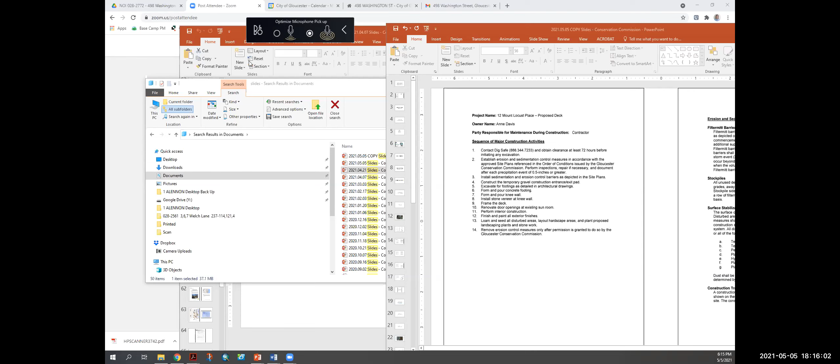So I noticed on Hart Street last year, a new house was built right on top of the wetlands that are at the end of the street, closer to Bass Ave. And I heard there's another plot right next to it that's also available for building. I don't understand it, it's right on the wetlands. It has the little waterway going right by the house. What is the ordinance regarding this? I thought our wetlands were protected way back.

Well, Kathy, if I may speak, the project came before us. It doesn't necessarily mean because it's in green on the website. All that means is it's in the buffer to the resource, and therefore they have to come before this commission, which that house did. It's a very unique situation, basically in the marsh, but it did get reviewed by this commission.

We have no control over what may or may not be another buildable lot, but we did review that one. They are protected when it comes to buffer zones. Everybody's allowed to come before the commission and propose a project. We did our job back then. Unless there's another project, we're not here to discuss things that don't exist yet.

I just wanted to know what the facts were, because a lot of times you see something being built before you even know about it. Everything's public, and if people don't choose to go look on the city's website or conservation page, they're all posted publicly 48 hours in advance, and all abutters get direct notifications. So it's kind of a cold argument to say nobody knows. It's that nobody's looking, unfortunately.

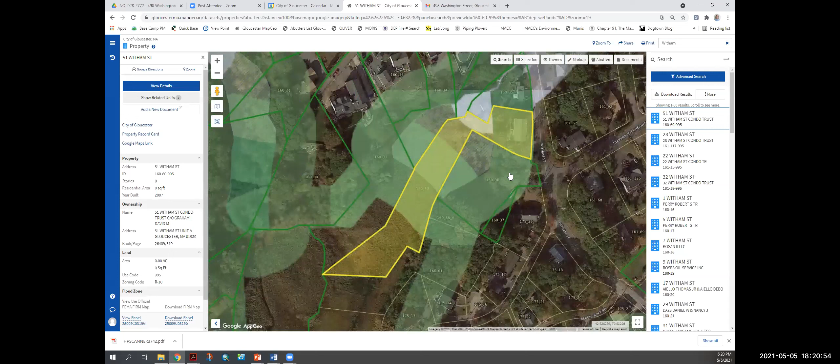Well, in this case, the abutters were not notified. They got a letter from the owner of the land the day before the trees were to be cut down. So that was not done in accordance with what was supposed to be done in the correct way. Well, a mistake could have been made. It's rare, but notification's required. They can't go forward without it.

So I don't know where your information came from. It wasn't done that way. My mother lives there, she got a letter, I saw it, and I talked with all the neighbors on Ledgemont Ave. They got the letter a day before. They were not notified ahead of time, and big oak trees that were 200 years old were cut down.

That person could have made a right of way on Mount Vernon Street. I don't know why a whole neighborhood had to be ruined and possibly a throughway road going through there. Unfortunately, we don't deal with that, we just deal with wetlands. Well, there was a pond there that was filled in, so there's wetlands there for sure. There's a map of it.

So who's the tree warden now? Is it the DPW director? I have no idea, I would assume it's not us. So there's no separate tree warden like there used to be back in the day? Not that I know of. There should be, that's something to consider again.

If I were in control of it, we'd have one, but I don't have that power. I heard it was the DPW director who was the tree warden, but to me that's a conflict of interest.

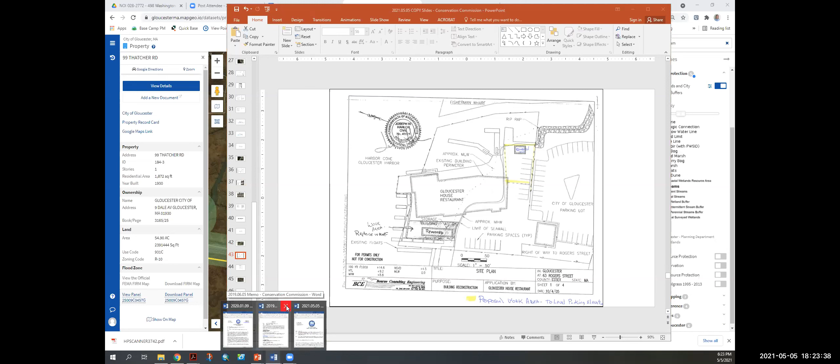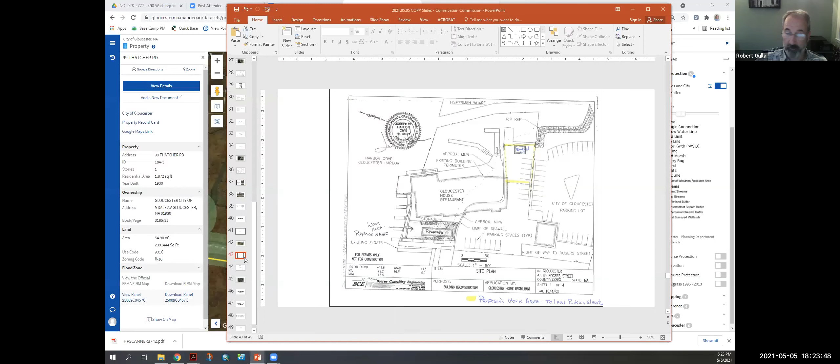Keep pushing on what's going on there. I mean, what do I do, call the mayor? Whatever you feel you have to do, but I'd really like to get back to this meeting so we can clean up some of the things we do have control over. Okay, well, go right ahead. Thank you very much, you have a good night. Yeah, you too.

Is there anyone else in the public like to speak? Shut me off, I'm still here. There's not. I'm here. Okay, next up, with seeing none, we'll close the public comment period.

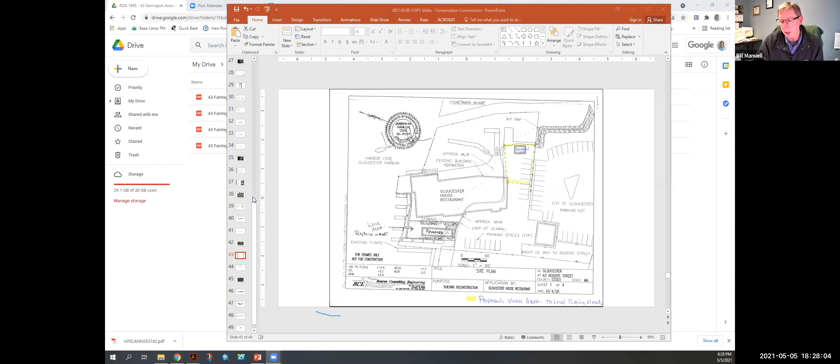The plan shows some very subtle swales along the left and right sides of the house—hopefully we'll get the plan up there, but I'll keep talking. Those were there because in the original hearing, the neighbors were concerned about runoff from this site going onto their property. There's a detail on the plan just to the left, and you can see it's a very subtle swale, about 6 inches deep.

I did have a conversation with the attorney for the abutter, and his concern was that there's a lot of vegetation on the property line, and they were worried the excavation work might impact those plants. I reemphasize, this is only a 6 inch deep swale—I don't think there's any root growth within 6 inches of the surface. If it happens to extend over the property line, I'm sure it does.

I told Attorney Nestor I would look into that, and I've been considering it. I asked the design engineer if that swale could even be removed, and he thought it was necessary to prevent any runoff from the site going onto the abutting land, which is a very important concern of the drainage permit. So I think that work can be accomplished by shovel work, or perhaps by running a rototiller set to 6 inches deep down that side of the property to loosen the soil, which can then be shaped with shovel and rake. The swale is comprised of filter fabric and crushed stone, so it's not a deep excavated feature. I think in some creative way along those lines we can accomplish that grading without any impact to the abutter's vegetation.

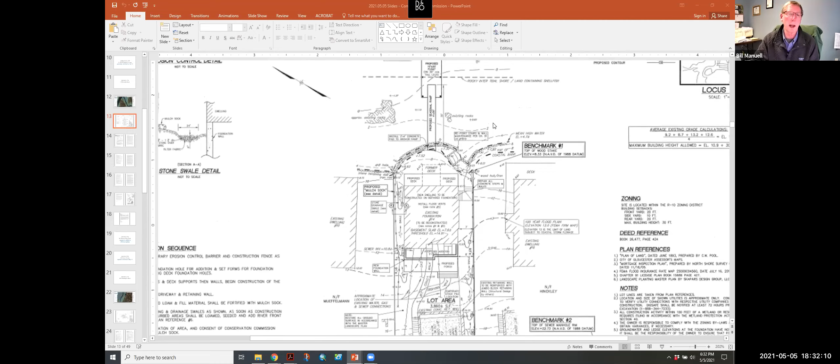It is a 30-foot ramp and a 10 by 20 float. It is not going to rest on the bottom at low tide, and it will have wood standoff legs so that it does not rest on the tide flats. The Division of Marine Fisheries commented that this was designed in accordance with the DEP guide for small docks and piers, and that they didn't have any other issues with it.

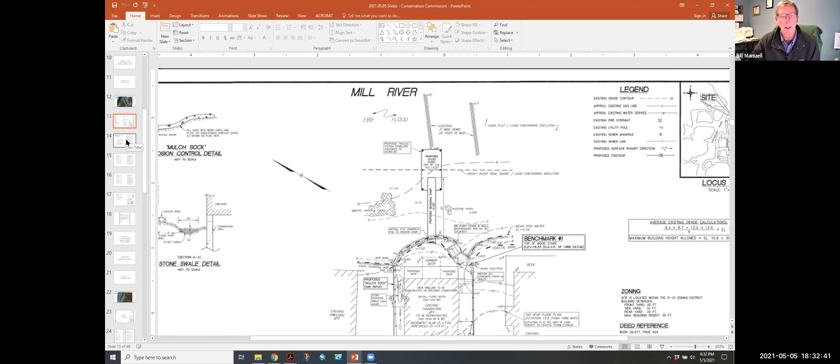We also included in the submittal an extensive landscape plan. So that is also included in the filing, and it covers roughly - the lot itself is only about 3,800 square feet, but there is about 1,500 square feet of landscaping proposed for the property, so that essentially it becomes a low maintenance or no maintenance type of landscape.

So we've got all the comments and file number and everything that we need. We've got the indication that we're going to get the drainage permit. We've got comments from DMF. We've got an updated site plan. So we feel that we're in a good position here to close the hearing tonight and get approval.

You are, I'm sure, going to hear from abutters' counsel. There are zoning issues, we're well aware of that. There were zoning issues when this was approved back in 2007. The owner went to the Zoning Board of Appeals and got all the necessary approvals from the Zoning Board of Appeals. Unfortunately, due to health reasons, he couldn't enact the permits and relief at that time, so they have expired. We intend on going back and obtaining all the necessary relief from zoning.

One last thing I forgot is the seawall. The usual, every time we come to the Conservation Commission, when there is a seawall, it is a masonry seawall, and we would like to repoint that wall and repair it. It's in relatively good shape, it just needs the usual remortaring and repointing. We can put tarps down - obviously the work gets done at low tide. The usual practice is we put tarps down so that anything that's chipped out of the wall can be recovered and then removed out of the intertidal zone.

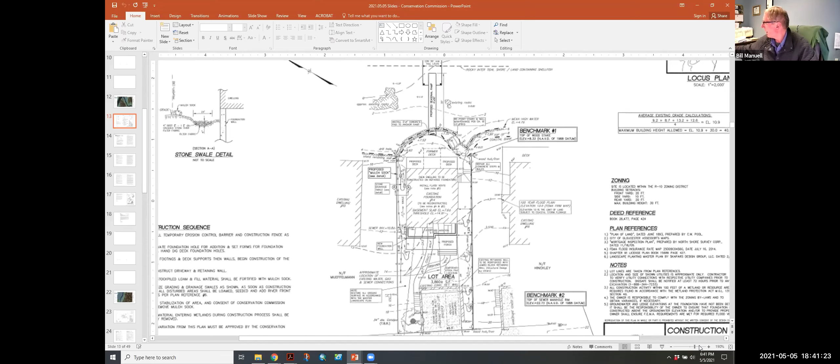I thought I had put on the plan to install an orange high-vis plastic fencing around the water edge, and I just checked and I don't see it, but that could be a condition you add - to install a plastic high-vis fence along the water line, and that way it'll catch any blowing debris. We can certainly double up the mulch sock. I suggested a 12-inch diameter mulch sock, which is fairly beefy - you can either do an 18-inch diameter, or do two 12-inch ones, one on top of the other.

Once you get down onto the grade of where the house is, the land is fairly flat. And as I said, the excavation work for the expanded footing and foundation is on the opposite side of the home, so I'm really not concerned that we're going to have a sedimentation problem.

With respect to the neighbors, you don't have to go there. We're not here to deal with neighbors. That's fine, I just want to point out it's a back and forth, and I did speak with the owners, and they're equally concerned with preserving the vegetation over there. So somehow we'll work out a solution that alleviates everyone's concern.

Thank you. Okay, with that, I don't know if you want to do roll call comments one more time. We want to move this, whatever the commission wants, it's up to you guys. Why don't we do roll call comments one more time now that they've had a chance to absorb it?

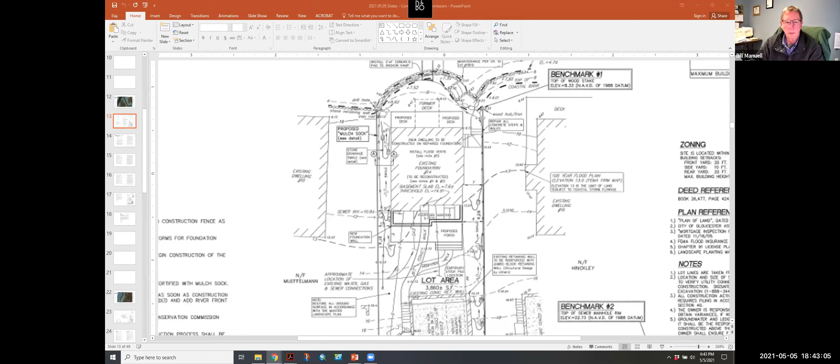Follow-up comments. Commissioner Charpentier, no comments. Commissioner Cook, no comments. Commissioner Gradwell, no comment. Commissioner Sargent, no additional comment. Co-chair Gullo, no more comments.

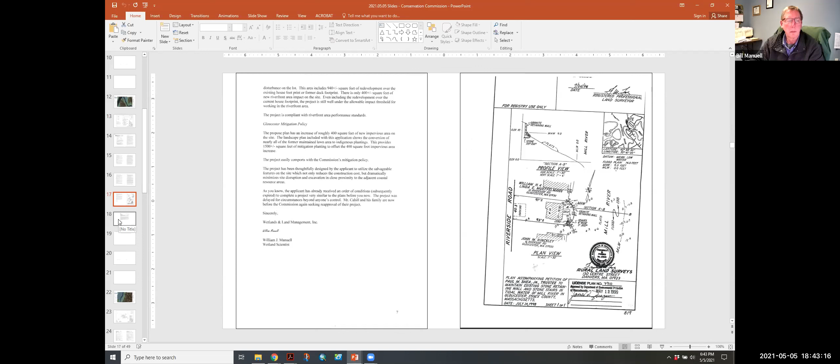And Co-chairwoman Jackson, no comment. Okay, so with that, why don't we get a motion to close the hearing? Commissioner Jackson moves to close the public hearing for NOI 0282779, 14 Riverside Road. Charpentier seconds.

Roll call vote: Commissioner Charpentier, yes. Commissioner Cook, yes. Commissioner Gradwell, yes. Commissioner Sargent, yes. Co-chair Gullo, yes. And Co-chairwoman Jackson, yes. Thank you.

Commissioner Jackson moves to approve the project for NOI 0282779 at 14 Riverside Road. Charpentier seconds. Roll call vote: Commissioner Charpentier, yes.

Commissioner Cook, yes. Commissioner Gradwell, yes. Commissioner Sargent, yes. Co-Chairman Gullo, yes. And Co-Chairwoman Jackson, yes. Thank you, thank you commission members.

Thank you. Before you move forward, Chairman Gullo, if I'm showing the wrong screen you have to let me know. Oh, I'm sorry, oops. I have 3 screens going. This is the right screen though. Now you can all see it, right? Yes, yes. Okay, thank you.

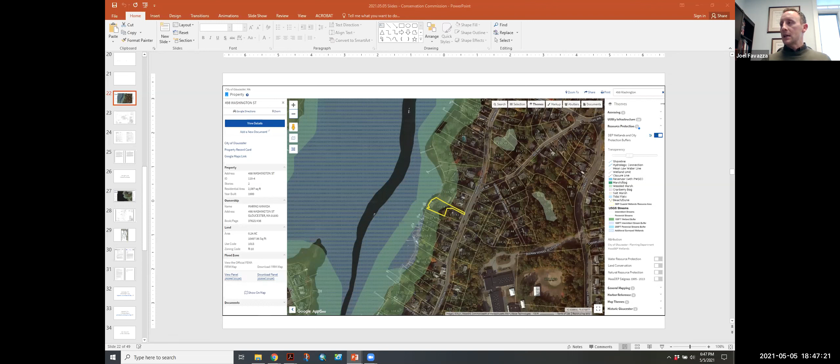We received some comment from the Division of Marine Fisheries regarding the deck that had been proposed. So we sent a retooled version of the plan that addressed both those comments and a few of the comments made by some of the commissioners at our last meeting. To go through those in no particular order...

The deck itself was originally 15 feet off the face of the proposed structure, which again is a rebuild. At our last meeting we talked about pulling it back another 3 feet and eliminating the piles to address some of the comments we'd received. Then based on additional comments, I believe from Mr. Sargent, we've tucked the deck in another 2 feet. So this deck is now 10 feet off the face of the new building.

There are no piles. Another comment that was brought up was the concrete retaining wall at the lower end of the driveway. That has been changed to a stone retaining wall to make sure that runoff is able to infiltrate into the dense mitigation plantings on its way down the driveway.

Now, we had stopped last time discussing the alternatives analysis, and we'll touch on that briefly.

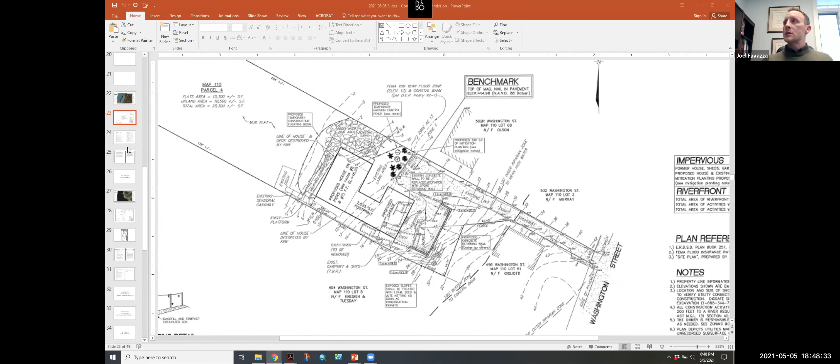Adrian, would it be okay if I shared the screen? I could do that for you, Joe, we'll have to step through. I will have to promote you to co-host, and then you can take over the share screen. Okay, thank you.

Thank you. One moment, I'll be right there.

Okay, so in thinking about how to discuss this tonight, make sure that we all understand these plans to get all the information that you need, sometimes have a lot of lines on them. So I try to color code this as best as possible so we can talk about what is going on in the Rocky Intertidal Shore area.

As you know, we're in the riverfront, so we have an alternatives analysis, and the standard we have to go by is whether the expansion of the existing structures improves existing conditions, and also whether the overall result enhances the capacity of the riverfront area to protect the interests identified in the Wetlands Protection Act.

One of the things that the Division of Marine Fisheries pointed out was that it's important to allow sunlight to hit the Rocky Intertidal Shore because that allows plant and animal life to receive the benefits of direct sunlight. So if you look at the plan I have up, I've tried to color code it. Me trying to make it simple means there's 5 different colors, so take it or leave it. I'm trying my best here.

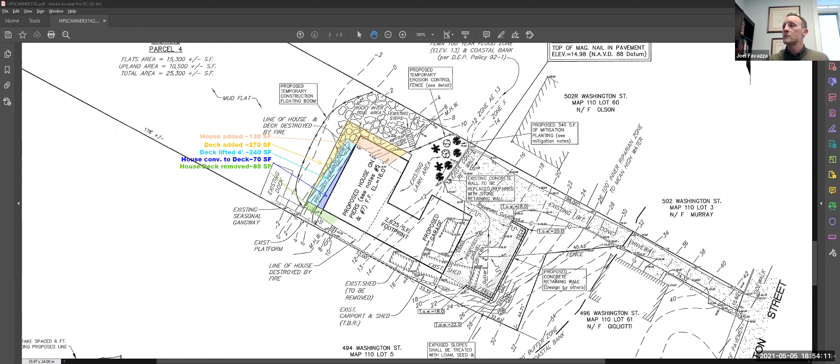Okay, thank you. So the first step would be, we need to move on. We have to vote on the alternatives analysis since I don't believe we did it last time. Did you want to speak towards that right now and clarify it for the commission so we can vote on that issue first?

I believe I have spoken to it sufficiently tonight. Again, if your standard is whether things will get better on this site, the old house was built directly into the resource area, the coastal bank. The old deck reached out at a corner as far as this new proposed deck will reach. I think overall the site gets vastly improved from an ecological standpoint based on the conversion of impervious to pervious surfaces, the mitigation plantings, and the lifting of the structure up out of the resource area. Per request from both this commission and the Division of Marine Fisheries, we removed any piles associated with the deck and shrank the deck by over 30% from the original design to try to meet a friendly compromise.

Okay, Joe, do you want to move to start the motion to accept the alternatives analysis? Happy to do it. For the record, I, Commissioner Jackson, have listened to the tapes for both the April 7th and April 21st meetings that I was unable to attend. Commissioner Jackson moves to approve the alternatives analysis for NOI 0282772 at 498 Washington Street.

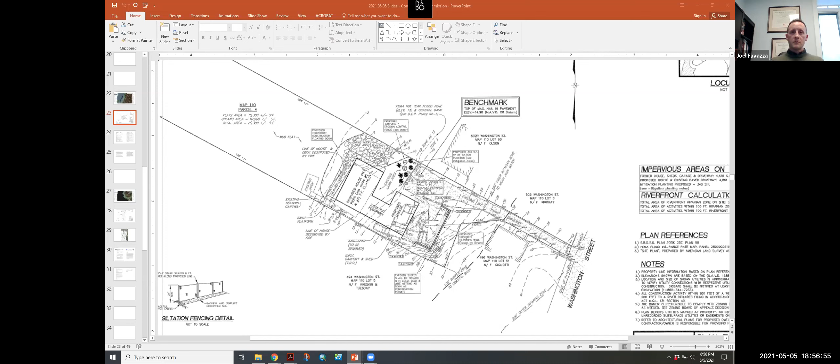Okay, commissioner roll call comments. Comments from commissioners: Commissioner Charpentier, no comments. Commissioner Cook, no comments. Commissioner Gradwell, no comment. Commissioner Sargent: Yes, high water still goes underneath the main building and it will be on piles. I asked last time if there was a Chapter 91, and if there isn't, how it would be dealt with. Any material used for those piles would have to be non-toxic in the marine environment. I also didn't see any monitoring plan for the mitigation.

Co-Chairman Gullo, no comments. Co-Chairwoman Jackson, none. I support Mr. Sargent's comments.

Okay, with all the commissioners commenting, Mr. Sargent had a few questions for you. Can you respond to those, please? Yeah, certainly. Obviously, the applicant intends to comply with Chapter 91. Basically, through the zoning process and then again through this conservation process, the plans changed.

As you may know, the Chapter 91 process is long. We did not want to get started with a set of plans and have to revise those plans multiple times, so we went through local permitting first. That's why we don't have the 91 in hand just yet. As far as the pile material, non-toxic is absolutely not a problem if you want to require that as a condition. Same thing for the mitigation plantings—if you'd like the standard 2 or 3 year monitoring to ensure a certain percentage survives for at least 3 growing seasons, that's not problematic for the applicant either.

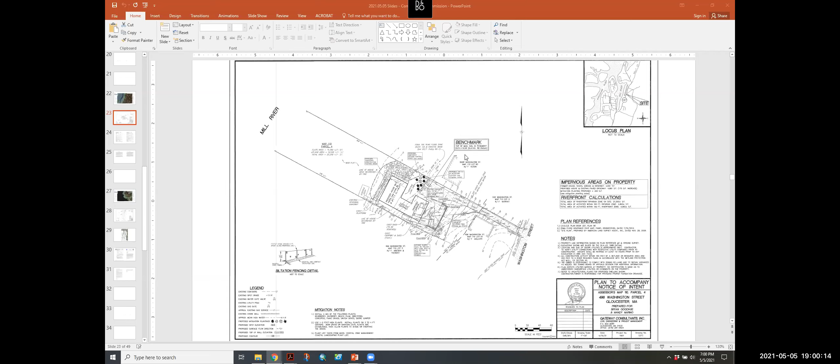Okay, next up, notice of intent 28-2774, 8 Island Rock Lane, with Bill Manuel of Wetlands and Land Management representing. Good evening, Bill Manuel, Wetlands and Land Management, Danvers, Mass.

The commission should be familiar with this property. They issued an order of conditions for a fairly significant house renovation in 2019. That work is ongoing. This property fronts very close to Niles Beach and faces out onto the harbor.

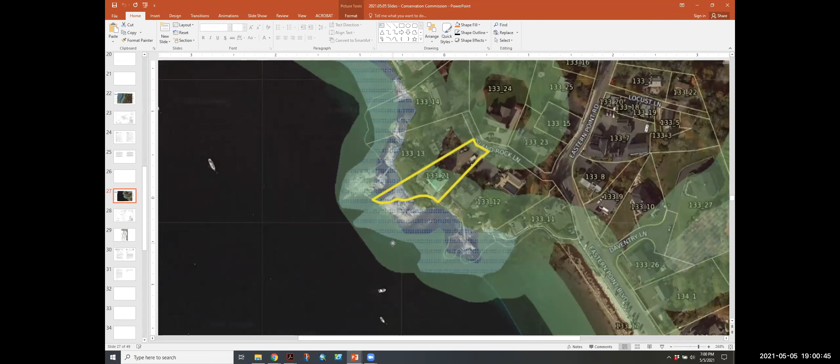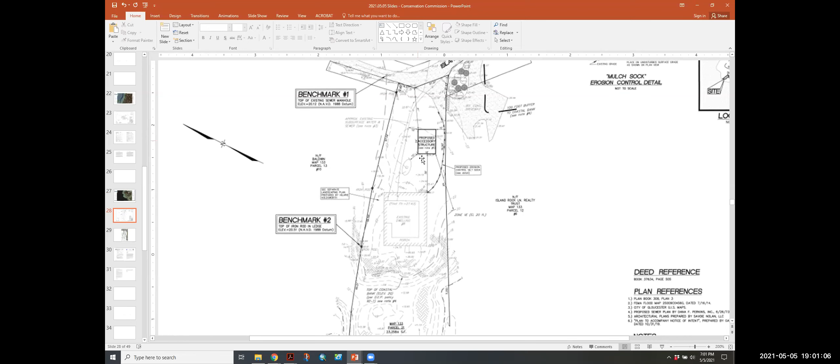What we'd like to do with this NOI is first, on the landward side, install an accessory building, a 24 by 18 accessory building up closer to the street that happens to be in the buffer zone to the Coastal Bank. We'd also like to install an 18-foot long pier with a 50-foot ramp and a 10 by 24-foot float.

Let me go back to the accessory building up front. As I said, the house has been under construction, and the front of the property has largely been used as a lay-down area and worker parking. There was a Connex box container there at one point, so as of now it's fairly devoid of vegetation. That accessory building would be constructed in an area that's basically wide open right now.

At the end of the project, there is an extensive landscaping plan submitted by Hillary Holdsworth, covering essentially from the street all the way to where the bedrock ends at the back of the house. It will augment the existing vegetation and add significant screening. The driveway is intended to be pea stone.

The accessory building is about 432 square feet, and we've got I think about 1,500 square feet of landscaping — it may be more than that, I don't have the exact number, but you can see the size of the accessory building versus the extent of landscaping. So we've more than offset the requirements for your mitigation policy.

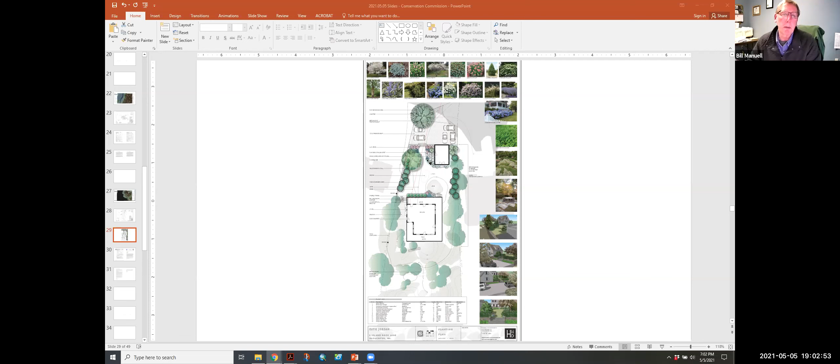Now jumping back to the pier, I want to let you know we're going to have to continue this hearing tonight, but I did want to get the discussion started. The DMF commented that there is eelgrass in this area, so we put a diver in the water to figure out where eelgrass is present. As it turns out, there is a very small patch of eelgrass right at the very end of the float, and if you proceed another 20 to 30 feet offshore, there is a more extensive eelgrass bed.

I had a conversation with Kate Frew of DMF this afternoon, and I'm going to share with her the results of our survey. I'll also share it with the commission. I'm going to be looking to Kate, and probably Tay Evans, for input and suggestions on what they would consider acceptable for work in and around those eelgrass beds. So I am going to ask to continue.

But the other thing I wanted to bring up was the size of the float, which is 10 by 24 feet, when the commission likes to approve 10 by 20. As I said, this is exposed to a good fetch of open water — it's kind of the rougher side of Gloucester. I do have a recommendation from a very well-respected marine contractor, Dirt Murray, who actually recommended the 10 by 24 foot float.

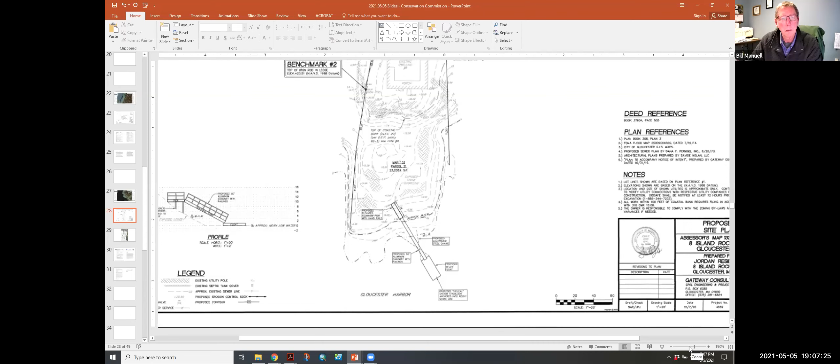Adrian, do you mind doing roll call comments from the commission? Commissioner comments for Commissioner Charpentier. Yeah, it's always these docks, and somebody always says there's wave action and it's intense, but we never see any data. So that's just my comment.

Thank you. Commissioner Cook. Well, like I said, I'd really like to hold it to a 10 by 20. I think a 4-foot difference really isn't going to make that much of a difference. It is much closer in towards the harbor, so I'd really like them to reconsider and go to the 10 by 20. But that's it.

Okay, Commissioner Gradwell. Where they're forced to reconsider moving it, they may be forced into the 20-foot limitation also. But generally, when we allow anything to go through, we require that the harbor master or the shellfish warden, or as in the last meeting, Dave Sargent's valued opinion — but we normally require something more than just a statement from some engineer.

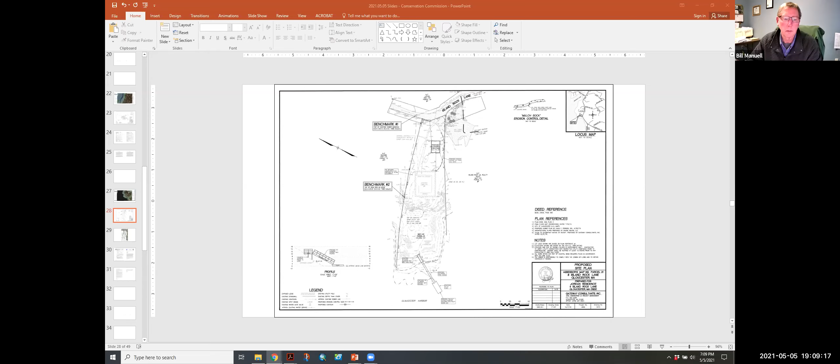Thank you. Commissioner Sargent. I will also say that this area does get a significant amount of fetch, unlike a previous approval down on Rocky Neck. With regards to the eelgrass, I'll wait for DMF, but obviously based on what Mr. Manuel said, prop scouring would be a real concern based on how he's depicted the area. I also noticed that the profile on the plan and the floating dock showed approximately 2 feet of water underneath the floating dock at mean low water. If this is accurate, then the floating dock, as well as any vessel tied to it, would ground out during certain astronomically low tides and in times of high wave energy. What measures are proposed to prevent this grounding from happening? The plan should more clearly depict that the floating dock is within the property's easterly portion of the water sheet and meets recommended setbacks from the easterly abutter's water sheet. And also all material must be non-toxic in the marine environment. That's it.

Co-Chairwoman Jackson: Yes, I do know Mr. Murray. I am aware of his reputation, but I would like to see his comments in writing along with his qualifications, just to back us up. Thank you.

All right, so I don't know if you want to comment on a couple of those, Mr. Manuel. You want to wait till you get your review from DMF, because a lot of things may change. I'm on the assumption most of the commission, if not all, is fine with the proposed structure and the plantings you're suggesting. I think the real issue here is the float and the dock.

I just do want to comment that I do have email communication from Mr. Murray that was included in the notice of intent. His qualifications are he's probably been on the water from about 3 days after he was born. I am aware of that.

Okay, and just a question to Commissioner Gradwell. I do see those comments. My apologies. Not a problem. What additional info, I was scribbling notes furiously - can you just elaborate on your comment?

Normally what we do is we get additional input from the harbor master or the shellfish commissioner. And I personally accept anything from Dave Sargent as being a qualified source. Same way that we considered John to be a qualified tree person.

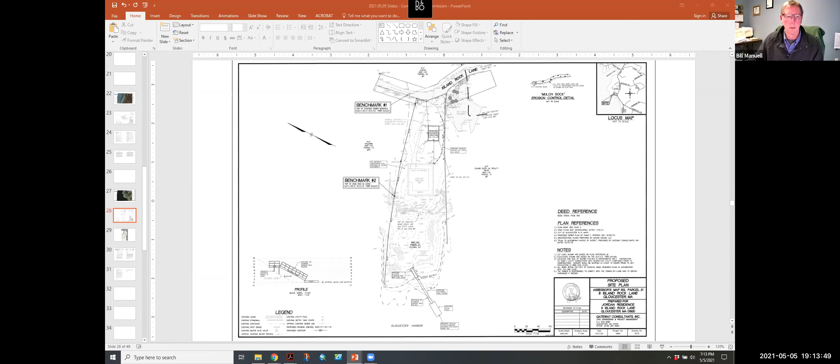Next up, notice of intent 28-2775, 14 Fort Hill Avenue. Applicant requests a continuation to May 19th, 2021.

Commissioner Jackson moves to continue NOI 0282775 at 14 Fort Hill Ave to the meeting of the Gloucester Conservation Commission on May 19th, 2021. Charpentier seconds. Roll call: Commissioner Charpentier, Yes. Commissioner Cook, Yes. Commissioner Gradwell, Yes. Commissioner Sargent, Yes. Co-Chairman Gullo, Yes. Co-Chairwoman Jackson, Yes. Thank you.

Next up, notice of intent 28-2776, 11 Webster Street, City of Gloucester. They are also requesting a continuation, or they've been previously continued, to May 19th, 2021. So we're all set there.

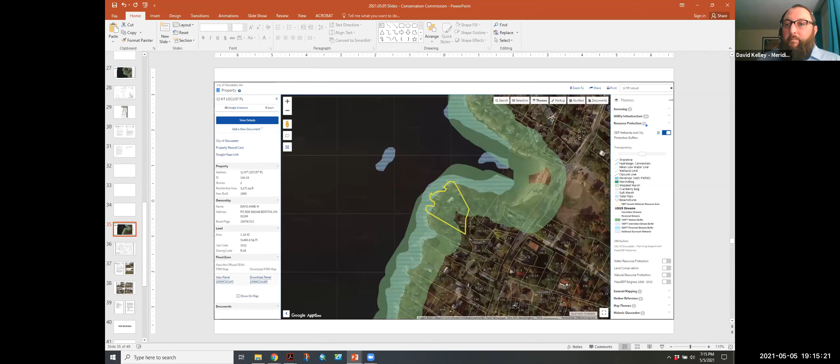Next up then would be notice of intent 28-2777, 12 Mount Locust Place, David Kelley at Meridian Associates representing. Good evening, David Kelley with Meridian Associates. We were before you at the last meeting. We were proposing a deck on the left-hand side of the existing dwelling located within the buffer zone to the mean annual high water. It was requested that some additional landscaping be provided to offset the impervious area created by the knee wall that would support the deck.

So adjacent to the proposed deck, we have proposed approximately 100 square foot mulch bed to be planted with some magnolias, some inkberries, some Bar Harbor junipers, and some dwarf fountain grass. In this picture, it's kind of to the right of that stump-looking thing adjacent to that stone retaining wall, tucked in between where the proposed deck would be and the existing landscaped wall. Is that all we were looking for at the last meeting, mitigation-wise?

Yes. Okay, so with that, I'll open up for the public to speak. For public comment, anybody in the public is welcome to speak for or against the project at 12 Mount Locust Place. If you want to speak, you may do so by hitting the raise your hand button at the bottom of your screen or hitting star 9 on your phone or tablet.

There are no comments from the public at this time. Seeing none, hearing none, I'll close the public comment period.

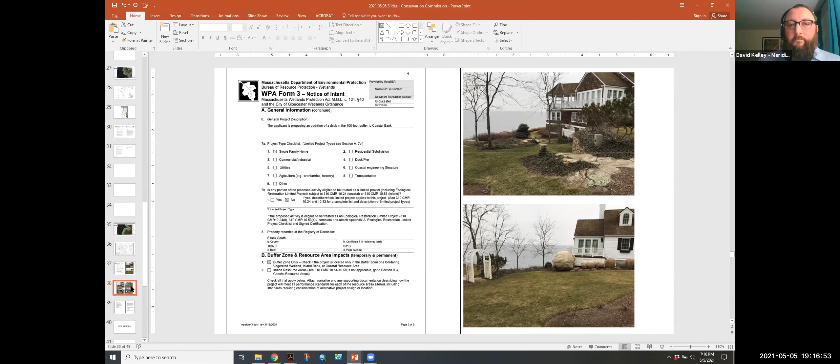Commissioner comments: Commissioner Charpentier, no comments. Commissioner Cook, no comments. Commissioner Gradwell, no comment. Commissioner Sargent, no comment. Co-Chairman Gullo, no comments. Co-Chairwoman Jackson, no comment. Joe, any comments? No, no comment.

This was a notice of intent, so can we get a motion to close the hearing? Commissioner Jackson moves to close the public hearing for NOI 0282777 at 12 Mount Locust Place.

Charpentier seconds. Roll call: Commissioner Charpentier, yes. Commissioner Cook, yes. Commissioner Gradwell, yes. Commissioner Sargent, yes. Co-Chairman Gullo, yes. Co-Chairwoman Jackson, yes.

Commissioner Jackson moves to approve the project for NOI 0282777 at 12 Mount Locust Place.

Charpentier seconds. Roll call: Commissioner Charpentier, yes. Commissioner Cook, yes. Commissioner Gradwell, yes. Commissioner Sargent, yes. Co-Chairman Gullo, yes. Co-Chairwoman Jackson, yes. Thank you.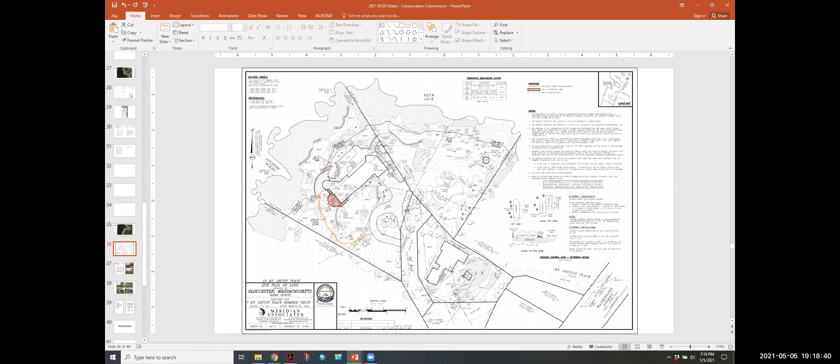Next up, new business. First up is RDA 1694, 0 Witham Street.

Mass Electric, represented by Sarah French and Vanasse Hangen Brustlin of VHB. Hi, this is Emily Martin, I'm actually presenting for Sarah tonight with VHB.

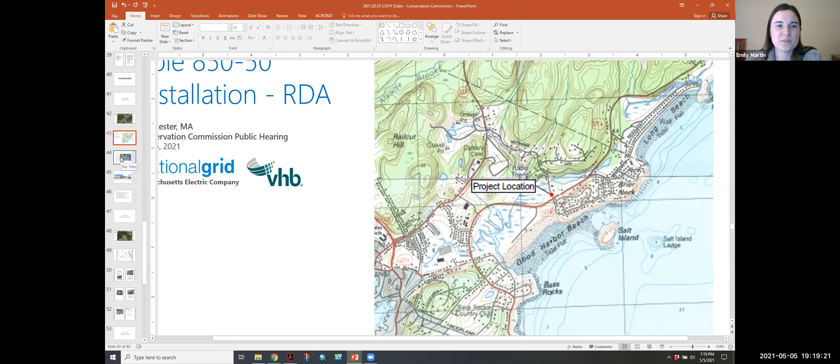Adrian, it looks like you have my slides. Thank you. So this is for a new pole installation along the shoulder of Witham Street, going in between existing poles 850 and 851. Here's our location - it's within the outer limits of the 100-foot buffer to salt marsh, and also within land subject to coastal storm flowage.

The new pole will be installed with a direct embed method, approximately 18 inches in diameter, resulting in about 2 square feet of disturbance to land subject to coastal storm flowage and the outer limits of the buffer zone. It's not anticipated to impair any functions of the resource areas or the buffer zone.

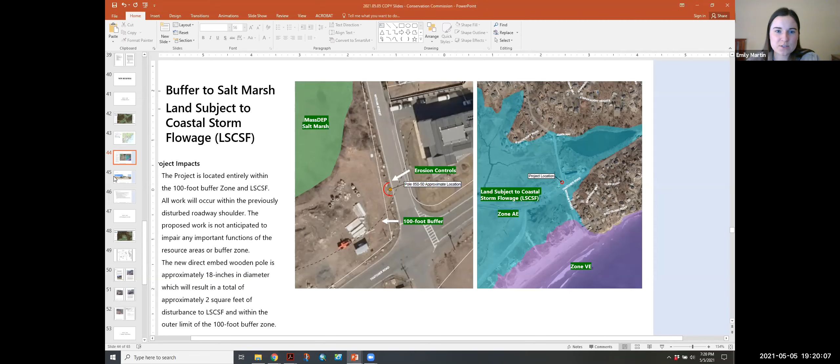Next slide shows the location, looking in both directions - north on the left and south on the right. It'll just be installed right in line on the shoulder here.

As mentioned, it'll be installed completely with all work done from within the trucks. Staging will be located on the paved roadway surface during work. They'll excavate 6 to 8 feet depending on site conditions, then place the pole into the hole and backfill with crushed stone or native material.

We have erosion controls set up between the work area and salt marsh resource area. Everything will be stabilized afterwards, and we'll remove any excess soils according to applicable laws. No stockpiling overnight in the buffer zone or land subject to coastal storm flowage. We don't anticipate dewatering, but we have some provisions laid out in the RDA if that is required.

Excellent, thank you. I'll open this up for public comment. Does anyone in the public wish to speak towards the project at 0 Witham Street? If so, you may raise your hand or hit star-9 on your phone. There are no comments from the public at this time.

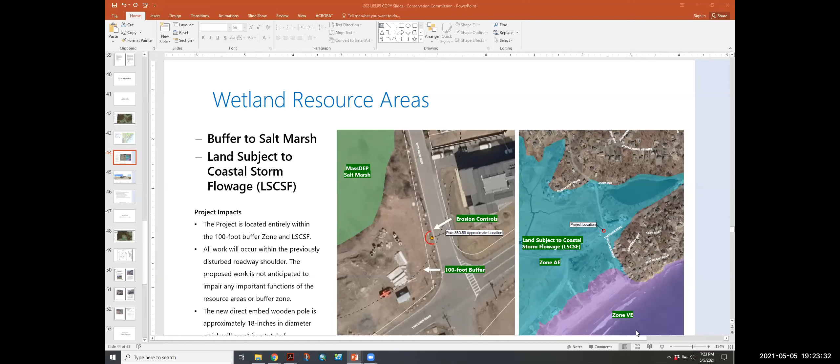Next up, RDA 1695, 43 Farrington Avenue, Sudbay Estate, with Dan Ottenheimer of Mill River Consulting representing.

It is owned by the estate of Phyllis Sudbay, and the family members, the Sudbay family, none of them live here. It's been kept in its native state for several years while the estate is being settled.

Last year, the Sudbay family descendants, the estate, were contacted by an occupant of that house to see if they might be able to top off some trees in order to maintain their view. Essex County Greenbelt, across the street from this parcel, was also contacted, and both parties gave verbal permission for that to occur.

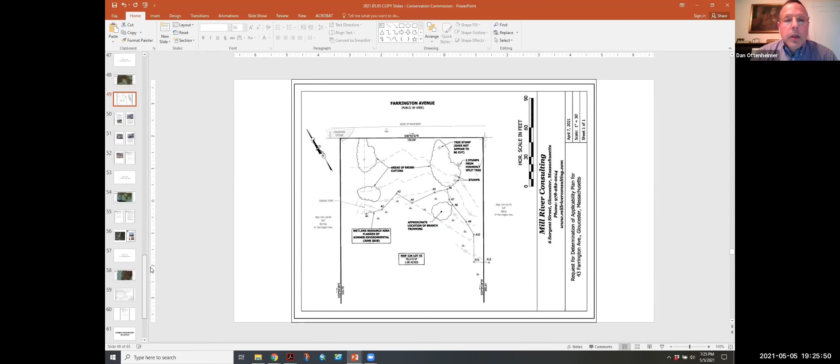So we have done that. You'll see a plan that we provided. Essentially, what was verbally described to the Sudbay estate to be a topping off of trees ended up being more than that.

So there are 4 areas where work occurred. One of those is in the wetlands. You can see at the bottom right, I've indicated the location of where branches were trimmed. That work there appears to have no trees taken down, just some branches topped off.

Above that is where most of the activity occurred. There are 4 trees that were taken down, as well as some brush that was removed. Those trees lay on the ground. There is no visible exposed soil. Doesn't look like they ripped out the trunks or anything like that. That's what occurred in that area.

The 2 areas on the left that I've highlighted, I'm not sure why those were trimmed, because it doesn't appear that there's any vegetation that was tall that was impacted there. It's all low brush. I can't explain much of this, but I certainly can't explain the thinking of the tree company about what might have happened on the left-hand side, because it would have had no impact on anybody's views.

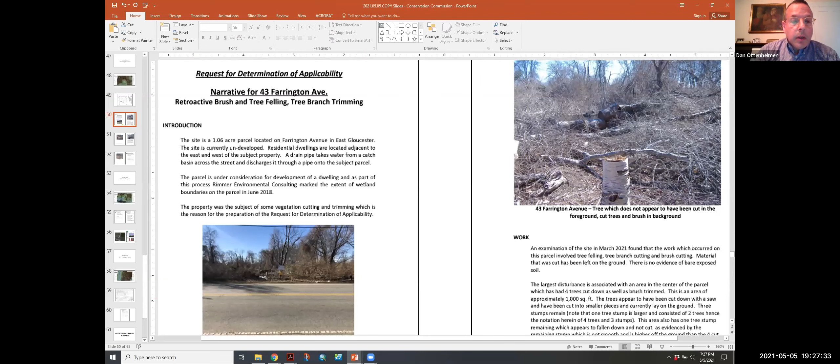So yes, Adrian, can we go to the pictures, please? On the bottom left, you can see the photo of the lot from the street. In the top right is the area where those 4 trees were taken down. The birch in the foreground, I think, was not taken down by the tree company, because the other ones are clean cut. This one's very jagged, so my guess is it just came down on its own.

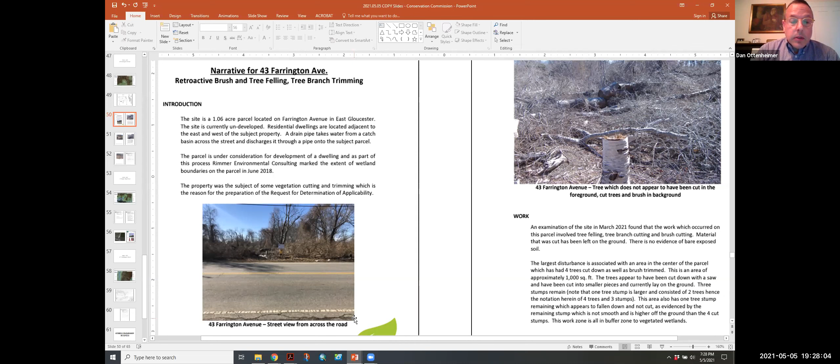One more advance to the next photos, if you don't mind, Adrian. So you can see the clean cut stumps that were clearly taken down, and there are trees laying that have been cut up as well.

So we are here because this occurred on the land of the estate of the Phyllis Sudbay family, and we obviously became aware of the extent of it.

We discussed with Adrian the best approach to take, and that was to file an RDA, in part to clarify the fact that there are wetlands on the property, and then also if the commission wanted us to do anything different as it relates to the vegetation that's laying on the ground currently.

Okay, that's the story. Again, this is a notice—oh, I'm getting some echo. Yeah, this is an RDA.

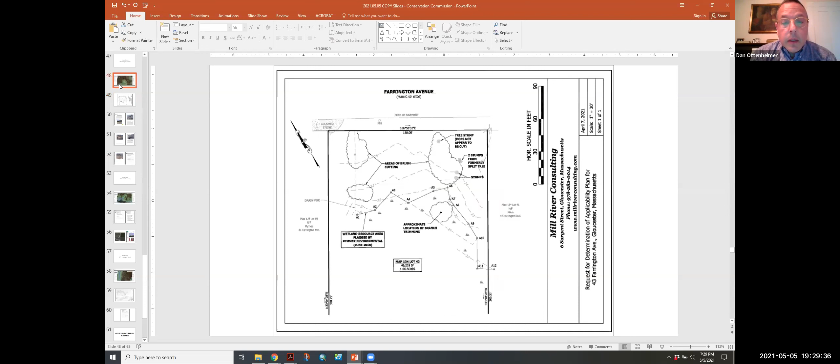The other piece, as the Sudbay estate is being transparent throughout all of this, is we are going to be submitting a notice of intent to the commission in short order. That is related to a proposed dwelling that may be constructed on this lot. Last week, the Zoning Board of Appeals granted relief to move a potential house further away from the wetlands and closer to the road.

And our next permitting stop would be to this commission. So I do want to let you know that that's coming up. And I'll certainly answer any questions you have or take any guidance you might have as it relates to this vegetation. Okay, with that, I'll open up for public comment.

Anybody who wishes to speak for or against the project at 43 Farrington Avenue may do so now by hitting the raise your hand button at the bottom of the screen or hitting star 9 on your tablet or handheld device. There are no comments at this time. Okay, with that, seeing none, hearing none, I'll close the public comment period.

Commissioner, want to do roll call comments? This is an RDA. My personal opinion is leave it alone and wait for the notice of intent for the project itself, if there is one. Otherwise, I'd leave it as is. But roll call comments, please.

Commissioner comments: Commissioner Charpentier, no comments. Commissioner Cook, no comments. Commissioner Gradwell, no comment.

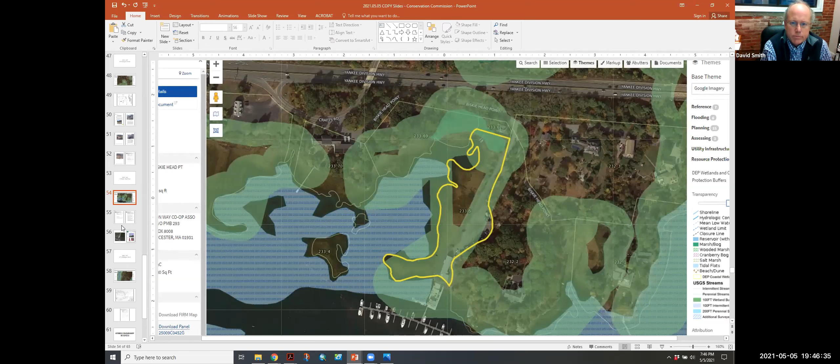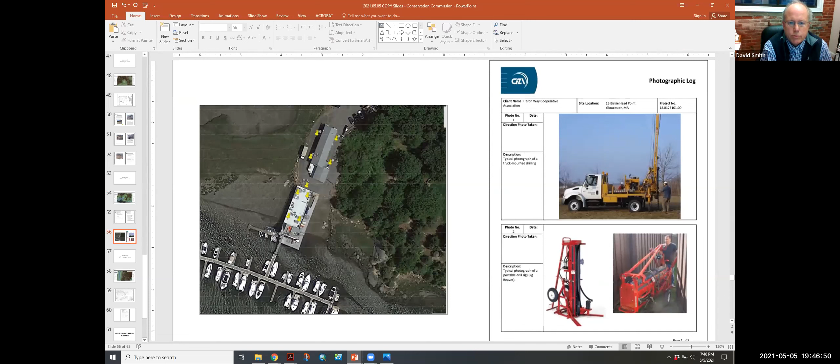This RDA is being filed to perform some geotech subsurface exploration work. They're looking to have this investigative work performed for some future building foundation work and also for a future pier reconstruction project. So what we're proposing is a minimum of 9 soil borings, 5 of them on land with a truck mounted drill rig, as you can see on the right hand of the slide. Those will be borings B1 through B5 encompassing the existing building, easily accessible with the truck rig, going down anywhere from 15 to 40 feet in depth.

In addition, we're looking to do at least 4 borings out onto the pier itself. We can't drive a truck onto the pier, so we have to use a different setup, the portable setup on the lower right of the screen. That will be accessed through the existing ramps on the pier, popping up some deck boards. We're looking to have both pieces of equipment on site at once, probably a 4-day operation.

This is going to be performed essentially in accordance with ASTM D1586 provision. We will have straw wattles if necessary, but this is going to use fresh water for drill water, encapsulated into a tub where the water is recycled and any cuttings captured. At the end of the hole, they'll be deposited back down and backfilled. So we should have very minimal impacts to anything around the boring locations.

Commissioner Jackson moves to close the public hearing for RDA 1696 at 22 Biskie Head Point. Charpentier seconds. Roll call: Commissioner Charpentier, yes. Commissioner Cook, yes. Commissioner Gradwell, yes. Commissioner Sargent, yes. Co-Chair Mangala, yes. Co-Chairwoman Jackson, yes.

Commissioner Jackson moves for a negative determination on RDA 1696, with the proviso that the applicant will delay the boring process as much as possible for protection of the run. Charpentier seconds. Roll call: Commissioner Charpentier, yes. Commissioner Cook, yes. Commissioner Gradwell, yes. Commissioner Sargent, yes. Co-Chair Mangala, yes. Co-Chairwoman Jackson, yes.

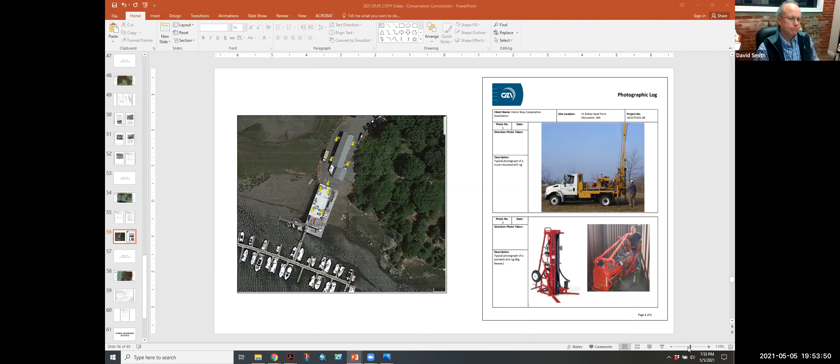Next up, RDA 1697, 473 Washington Street, Ashburn Development Corp representing.

I'm going to have to recuse myself. Excuse me, oh, okey doke.

Thank you, Adrian. So commissioners, I got called too for this. Bottom line is National Grid has had some troubles with other municipalities about doing egregious work, and therefore they won't touch any project unless they get a letter from the local commission saying that there are no wetlands on this property. I would ask, would you agree, Adrian, that there aren't any wetlands on that property? The property subject to the subdivision, there are no wetlands. That's correct.

So I will open up for comments from the commission. There is no wetland. He just needs a letter saying so.

Commissioner comments: Commissioner Charpentier, no comments. Commissioner Cook, comments? Commissioner Gradwell, no comment. Commissioner Sargent has recused himself. Co-Chair Mangala, no comments. Co-Chairwoman Jackson, no comment.

With that, Andrew, I guess you can just move this to close. Commissioner Jackson moves to close the public hearing for RDA 1697 at 473 Washington Street. Charpentier seconds. Roll call: Commissioner Charpentier, yes. Commissioner Cook, yes. Commissioner Gradwell, yes. Commissioner Sargent is recused. Co-Chair Mangala, yes. Co-Chairwoman Jackson, yes.

Commissioner Jackson moves for negative determination for RDA 1697 at 473 Washington Street. Charpentier seconds. Roll call: Commissioner Charpentier, yes. Commissioner Cook, yes. Commissioner Gradwell, yes. Commissioner Sargent is recused. Co-Chair Mangala, yes. Co-Chairwoman Jackson, yes.

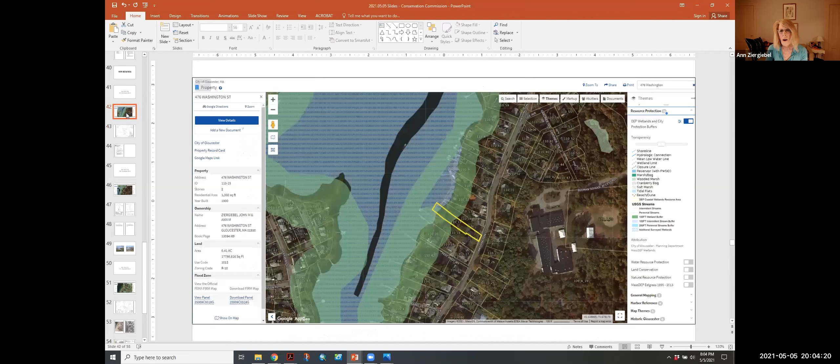Sure, comments from commissioners. Commissioner Charpentier, no comments. Commissioner Cook: it says a pier, but is this actually a seawall repair? It's really just a matter of terminology, but it seems like it would be better characterized as a seawall repair versus a pier repair.

Great point, and I defer to Gateway Consultants, that was their terminology. Okay, seawall repair then. That was the only comment they had. Other than that, I thought you did a great job presenting it. Oh, thanks, thank you.

Commissioner Gradwell: no comment, and I agree it's a seawall. Commissioner Sargent, are you back with us? Thank you, Ann, good job. But I want to make sure that if any granite blocks need to be replaced, they won't be replaced by water, that all the work will be by land, and there won't be any additional riprap placed down. That's it, thank you.

Co-Chairman Gulla, no comments, and Co-Chairwoman Jackson, no comments. Thank you. Okay, then with that, unless there are any other comments, we have a few conditions here from Mr. Sargent. Otherwise, I guess we can move to close. Certainly, Commissioner Jackson moves to close the hearing.

Do we have a DEP number for this? Yep, 2780. Commissioner Jackson moves to close the public hearing for NOI 028-2780 at 476 Washington Street. Charpentier seconds. And a roll call, Commissioner Charpentier.

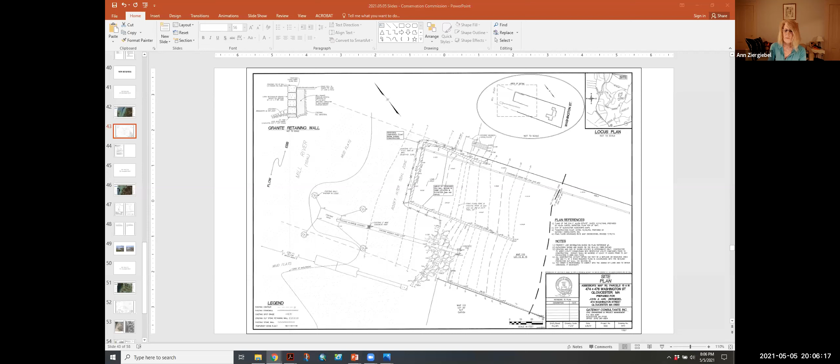Yes. Commissioner Cook, yes. Commissioner Gradwell, yes. Commissioner Sargent, yes. Co-Chairman Gulla, yes, and Co-Chairwoman Jackson.

Yes. Thank you. Commissioner Jackson moves to approve the project for NOI 028-2780 at 476 Washington Street with the conditions incorporated from DMF and from Mr. Sargent. Charpentier seconds. And a roll call, Commissioner Charpentier.

Yes. Commissioner Cook, yes. Commissioner Gradwell, yes. Commissioner Sargent, yes. Co-Chairman Gulla, yes, and Co-Chairwoman Jackson, yes. Thank you.

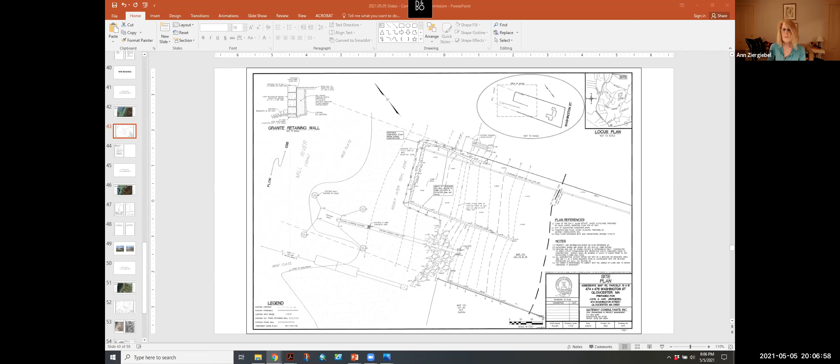Okay, next up, notice from the 10/28. Thank you, good luck. Next up, notice of intent 28-2778, 542 Washington Street, Miller, Timothy Miller applicant representing. Is Mr. Miller with us? Yes, hi, I'm here. Name and address for the record, sir? Sure, Tim and Melissa Miller, 542 Washington Street, here in Gloucester.

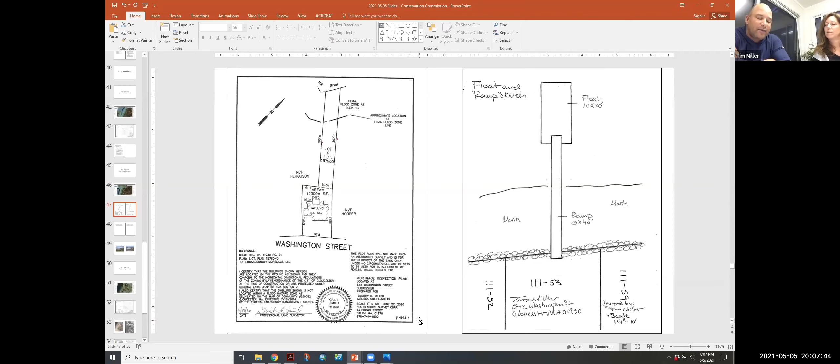Brief description of the project? Sure, we're applying for a 10A seasonal float permit. We plan on having a 10 by 20 float with a 3 by 40 aluminum ramp with flow-through decking.

We just bought the property not even a year ago. Well, there you go, there's my little description, my little sketch. Less is more.

Okay, great. Most people keep talking, just dig a hole or something, so. Okay, cool, better when you keep it brief.

I'll move right to public comment first, as usual. Now's the time for anyone in the public who wishes to speak for or against the project at 542 Washington Street. You may do so now by using the raise your hand button or hitting star 9 on your tablet or handheld device. There are no members of the public to comment at this time. Okay, seeing none, hearing none, I'll close the public comment period.

Next up would be commissioner comments and questions. If you want to start with roll call comments. Commissioner Charpentier: it looks straightforward, I have no comments. Commissioner Cook,

I do. The first question is, how do you plan on securing the ramp to the top of it? I'm going to say it's a stone wall. Are you putting in a concrete platform that it's going to be adhered to? And then, where it is going to be seasonal, so the ramp is just going to be pulled out completely?

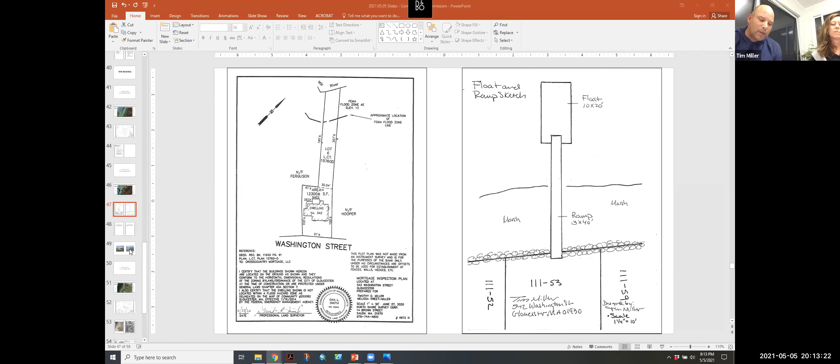So I didn't provide a sketch for the side view, I apologize for that. I do have some photos of the area. So the ramp will be pinned to some granite that's there, and so it won't impact the wetlands in any way. And it will be pinned to the granite stones that are there, and then of course it'll be on the float.

The float will be anchored by the helical anchors, two of them that will be out there, and then two cross lines that will also be pinned to two large granite boulders that exist on the wall. The decking is going to be decked with what they call flow-through decking, so that will allow light for the marsh. And it also will be sitting up at a minimum of three feet above the existing marsh.

Someone had already mentioned that. This, putting in the float and the ramp, will definitely have a whole lot less impact on the marsh than through traffic or walking through with kayaks and foot traffic. And the only other thing I can say is everybody to the left and to the right of us all have existing floats, and so we would just like to have one of those as well.

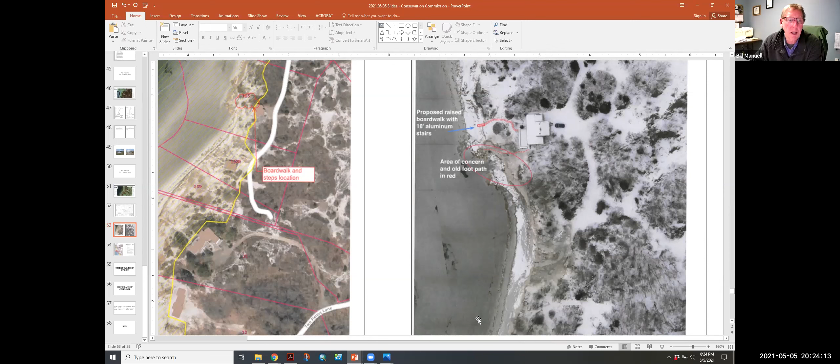They get 30 days, and we're about 14 days into that 30-day review period. So we're not ready to close the hearing, but I'm hopeful by the next hearing we'll have natural heritage comments about this. Obviously it's the piping plover that's here, and I'm sure we'll probably get a no-take, perhaps with conditions similar to what they issued at the 132 rear property.

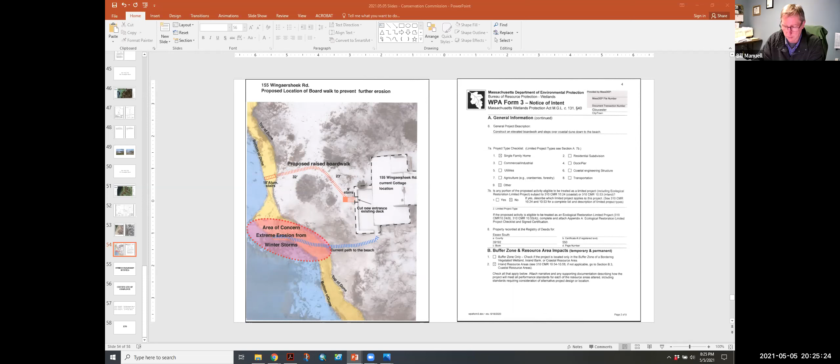And you have the floor. Go ahead. Good evening, Commissioners and Bill. Name and address of the record, sir. My name is Tom Mantle.

I reside at 1037 Washington Street in Gloucester, but I'm also the managing trustee for a family property at 79 Wingersheek Road. As a result of winter storms in late 2013 and early 2014, we had a similar situation as being faced by Mr. Manuell and the Combs, in which there was a 10-foot escarpment created by beach erosion in front of 79 Wingersheek Road. Rather than trying to just create a sand ramp down from the top of the dune escarpment back down to the beach for access, we applied to the commission to put in a ramp similar to what Mr. Manuell is proposing.

And an aluminum set of stairs, which were seasonally installed and seasonally removed. And the commission at that time required us not to put in posts, but rather helical bases, essentially big concrete bubbles with posts with metal rods going in various directions to support the ramp.

I noticed that Mr. Manuell had indicated he was going to do regular posts. If that was a requirement imposed by the commission in a very similar situation in 2014, I'd like to ask the commission to consider imposing that as a condition. Mr. Manuell, Bill, you're welcome to go by 79 Wingersheek Road at any time. Go up to the end of the beach path and take a look at what we've got installed there. The ramp is still there, the beach is built up, and hopefully on your side it will build up again over time.

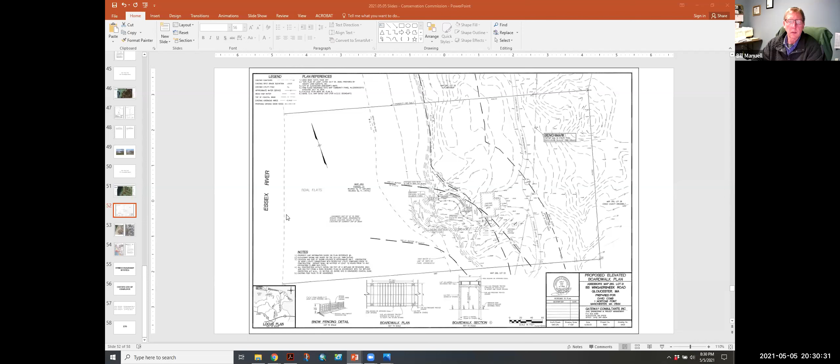And 155 did allow me to access their property to try to get there, and it was extremely dangerous—a pretty steep drop-off getting down there. I know it's only gotten worse, so putting the stairs in there is a good idea, never mind just for the safety, because it is very dangerous. It's down to bedrock in a lot of the areas along there, and it's getting worse. That whole stretch from the castles down to the marsh is just going back further and further every year. So I'm in support of this.

Thank you. Okay, Commissioner Gradwell. I have no further questions. I do not remember this engineering change in 2014, and I'm very good at remembering engineering changes. I'll see if I can research some of that. Thank you. Okay.

Commissioner Sargent: I want to congratulate the applicant for probably doing the right thing, and I'm wondering if there's any potential to revegetate the existing footpath as mitigation. That's it.

Okay, Co-Chairman Gulla: no questions at this time. Co-Chairwoman Jackson: simply that we do have an alternatives analysis. The site is located upriver of the mapped mouth of the Essex River, and maybe we need to vote on that.

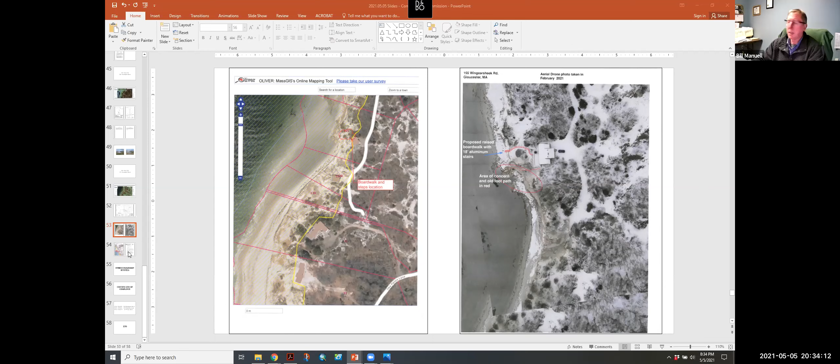So when do you want to continue to? Let's please continue this to the May 19th agenda, please.

Commissioner Jackson moves to continue the hearing for NOI 0282783 at 155 Wingaersheek Road to the Conservation Commission meeting of May 19th, 2021. Charpentier seconds. Roll call: Commissioner Charpentier, Yes. Commissioner Cook, Yes. Commissioner Gradwall, Yes. Commissioner Sargent, Yes. Co-Chairman Gulla, Yes. Co-Chairwoman Jackson, Yes. Thank you.

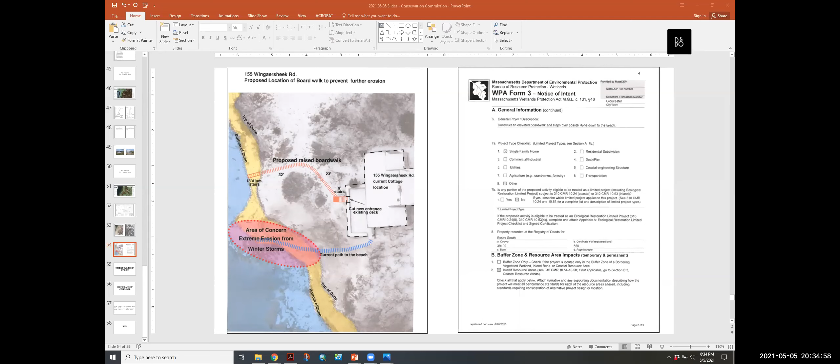All right, thank you. Next up, notice of intent, no DEP number that I see on my chart, 24 Fernwood Lake Ave, Lee.

I'm going to say Mingzu Yang, applicant and representing. I saw Ming on here, so we'll give him a minute.

Hello? She's still muted, I think. Yeah, can you see her? I see her on my list of participants. She's muted and no video. But she might have stepped away for a second because she did have video a short while ago.

Okay, we can come back. We can table it and come back. So next up would be notice of intent 28-2781.

2781, 77 Wingaersheek Road, Peck, John Judd at Gateway Consultants representing. Thank you, Mr. Chairman. John Judd here, representing the applicant Nathan Peck, who I believe is in attendance as well for this project at 77 Wingaersheek Road. My address, for the record, is PO Box 6085 in Gloucester.

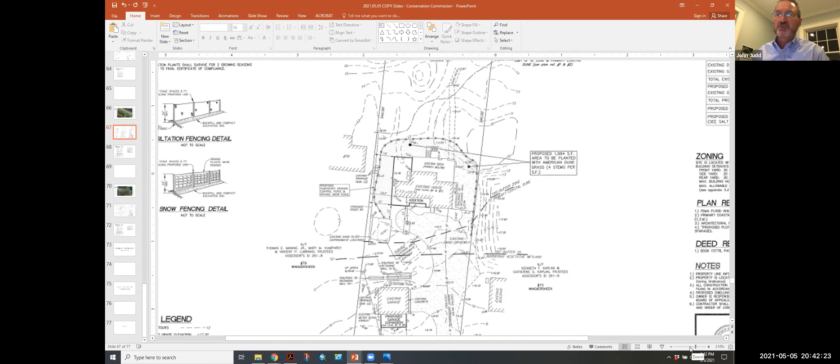Yes, thank you. Let me just get that last comment that Dave had first, if I could maybe go backwards. The dune grass would be planted in the fall to give it the best shot, as by the time this project gets mobilized it would probably be sometime in June, and it might even take place later in the summer. So it really depends on Mr. Peck, but certainly we would do it during those ideal times of the fall. I agree with Dave that those are the optimal times, and that's when it would take place.

As far as the elevation, the first floor is proposed to match the existing, which is elevation 13.74 for the first floor, and that would match the same. It was not intended to put this addition on elevate it with the free flow of sand, because the existing grade there at the ground is about 12.7, so it would only give us about a foot to create any kind of free flow of sand.

And as you know, we're less than 50% as far as the footprint, so we don't have to meet the full standard. And certainly for the Pecks, this project would be cost prohibitive for them to do the whole house over, to put it all on pilings. So I'm not sure if that answers your question, Dave, but the answer is they were going to match it with a conventional spread footing and mitigate 200% of the American dune grass as shown.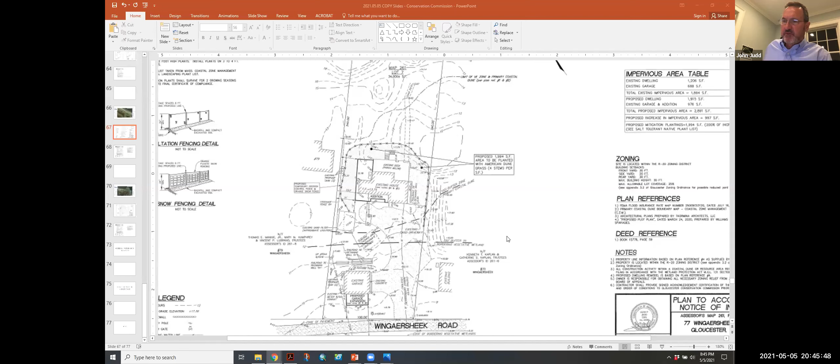Yeah, and the applicants were aware that if they were to do a major renovation, more than 50%, then it would trigger, as you know, the 50% rule to make it fully meet the standard for sand movement. Okay.

All right, that was it from me. And Joe, I guess you're up. No comments. Okay. Dave, I don't know, did that cover everything you wanted, or did you talk about foot traffic too before I jumped in?

Yes, I did. It looks like there'd be foot traffic from the stairs as well as access to the propane tanks based on where the mitigation area would be.

As far as the filling of the propane tanks, the truck would typically go back up into the gravel driveway, and this is at 1 inch equals 20 feet. So you're under 40 feet total between the edge of the truck and the propane tanks as it fills up at this point. Typically the hose can reach that without a problem.

But I think there would be foot traffic through there. But there's definitely going to be foot traffic there. Are you thinking maybe a boardwalk across that?

I don't know, or maybe even the mats that allow the grass to grow through, that would allow them to still use it as traffic but not crush the dune grass. We were open to that, and I can certainly modify the plan to indicate that around that westerly side of the house for foot traffic, which is inevitable for a house like this.

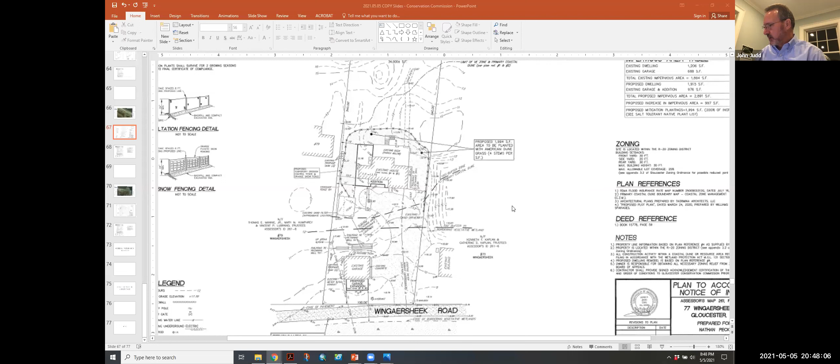Maybe there's even further, I don't know the vegetation situation here, but maybe there's an opportunity to find some other slots to fill so people can walk around there rather than put it right where they're going to need to get around the building. Maybe you extend it more out, do more work out near the primary dune as far as dune grass plantings.

Yeah, there's certainly opportunities out there which I can take a closer look at, and modify. That would be appreciated because Dave's right, you're going to plant all this stuff and it's going to get trampled just to get around the building. So it might be better to just get it out of the way so it doesn't impact anybody.

Sure. Okay, do you mind, can we continue this next meeting and you'll take a look at that? Well, I can certainly modify the plan to accommodate that and do an equal balance if that's okay, and work that out with Adrian, if that would be acceptable.

I hate to carry this 2 more weeks for you, but I'd like to see it just because it's a real sensitive area. Sure, okay, I appreciate that. Yep, Dave and I obviously have some concerns here and I'd love us to be happy before we sign off. Okay, so unless any other commissioners have any other comments, why don't we move to continue this?

Commissioner Jackson moves to continue NOI 0282781 at 77 Wingaersheek Road to the Conservation Commission meeting of May 19th, 2021. Charpentier seconds. And a roll call: Commissioner Charpentier, yes. Commissioner Cook, yes. Commissioner Gradwell, yes. Commissioner Sargent, yes.

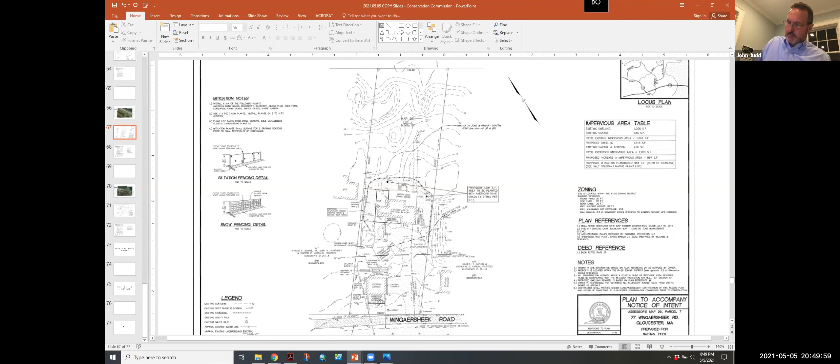Next up, notice of intent 28-2782, 6 Wyoma Road, Wilson, John Judd of Gateway Consultants representing. Name and address for the record again. Thank you, Mr. Chairman. Once again, John Judd, engineer, Gateway Consultants, Gloucester, Mass.

This is a proposal for 24 feet of improvements to an existing condition of erosion taking place on the westerly side of Dr. Wilson's property. We submitted some photographs of what's proposed and what exists in the area. We have a site plan as well, but you can see the subject site is encompassed in yellow here. This is near the base of Waterman Road.

Those of you familiar with this, it's adjacent to Point Road, which is on the right. We're just to the left, and there's tidal action that's been coming in more recently, affecting the shoreline and causing erosion to the left of the house, or the west of the house, if you will.

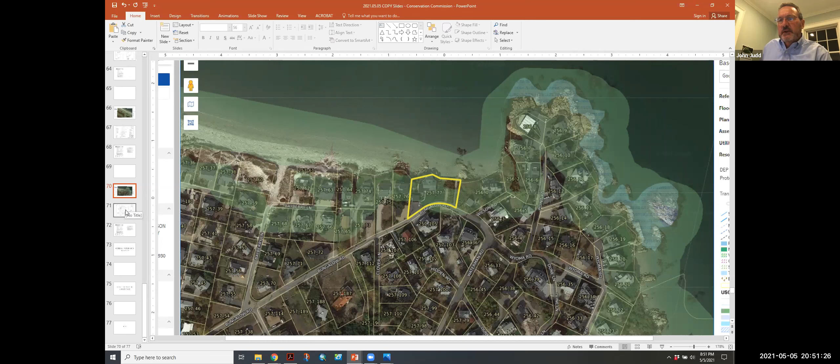This is a site where the house was rebuilt within the last 10 years. They did a nice job updating the septic system and renovating the house and existing garage. So Dr. Wilson would like to fortify, as you can see on the site plan, using loose rock.

You can see we have a section view of boulder treatment with filter fabric underlined under that. We're not looking at a vertical wall or anything like that. We're just looking to stabilize the existing erosion taking place along that section of the walkway and the neighbor's property line.

We did have some photos. I didn't know if they showed up, Adrian, in the package, but if they are available—that's really the extent. Yeah, so that's looking at it with your back toward the ocean.

If you zoom out, you can see what's happening is you're getting tidal action that's going up and causing erosion. It's been disconcerting to the Wilsons, and they're not looking to create any kind of area or fill. They're just looking to fortify it with boulders on a filter fabric base.

We also had one other photo of the adjacent property, which is essentially what they want to do. And I walked over it. It's one house over. I'm not sure if that showed up, Adrian, but that's the proposed conditions.

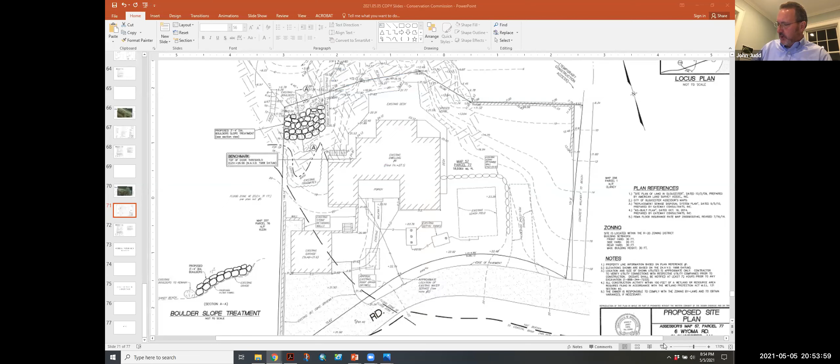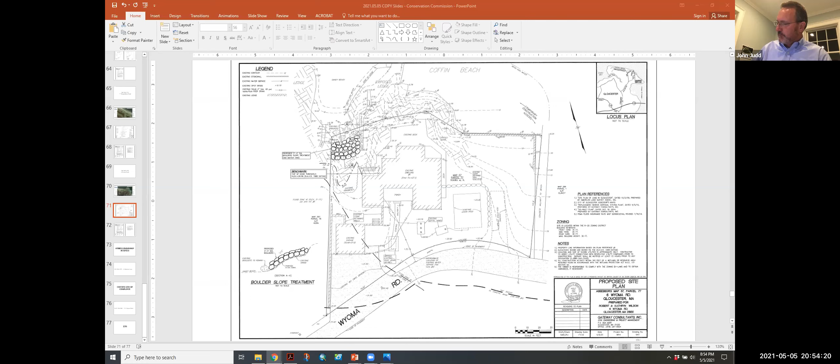Thank you very much. My father built this house 70 years ago, and I've seen the changes in this beach, most of it positive over the years. But this area, back in 1978, in a big blizzard, took a beating—the highest I'd ever seen the ocean in this beach. And the neighbors put some rocks in there to kind of protect their side.

Back then we didn't. Then back in 2016, when we had those four big blizzards, we had some significant changes in that area. We asked at that particular point, and it wasn't approved. But this past storm, this winter, did some further damage, undermining and destroying that area.

We just want to protect our house and the house next door, and kind of diffuse some of the energy in the ocean that comes up there. That's why we don't want a flat wall or whatever—that was by the suggestion of Mr. Judd. So I appreciate you looking at this, and thank you for letting me speak.

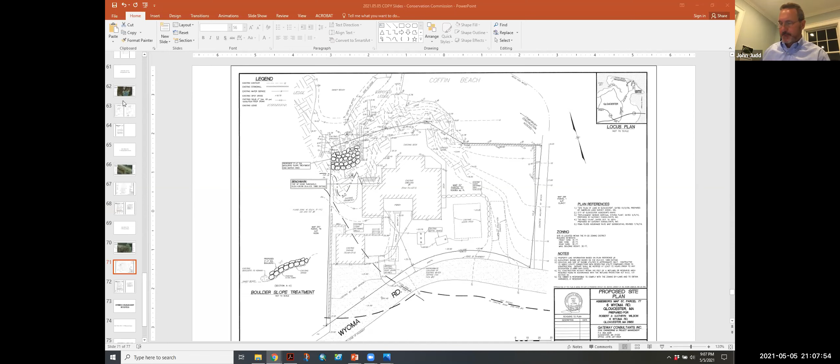Thank you. Okay, we're going back to 28 dash NOI, DP number 24 Fernwood Lake Ave, Min Ju Yang. How you doing? Sorry we had to bump you. We tried getting you on before.

I'm sorry, the public signal's no good. Yeah, we're having some feedback. They have two units working. Oh, is that what happened? Yeah, shut down one. You have to shut down one of your devices, we're getting an echo. Can you hear me now? Yes, but it sounds like someone else has a device on. You can only have one device on or we get an echo. Sure. Better now? Better.

Okay, name and address for the record? Yes, sir, my name is Min Ju Yang. I'm the owner of 24 Fernwood Lake Avenue in Gloucester. There is a deck in my house, it's in a very bad situation, it's almost falling down. So I want to apply for a permit to rebuild a safe deck.

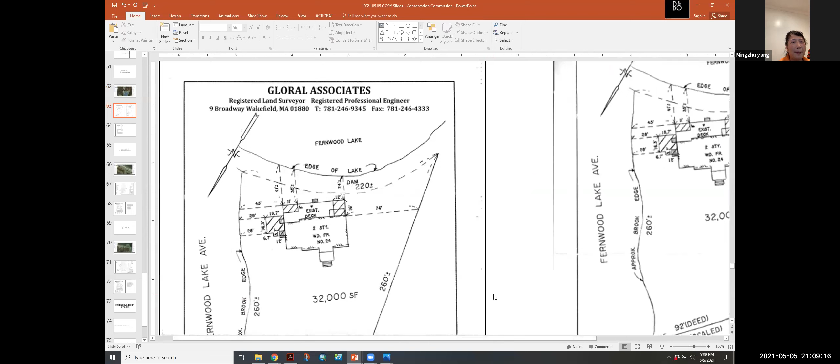Okay, is it in place of an existing deck? Hello? Yes. So you said the existing deck, the one you're going to remove, you're going to put it back exactly?

Oh, yes. Okay, let me open it up for public comment. Does anybody in the public wish to speak towards the project at 24 Fernwood Lake? If you want to speak, you may do so by pressing the raise your hand button at the bottom of your screen, or you may use star 9 on your handheld device or phone. There are no comments from the public at this time. Okay, seeing none, hearing none, I'll close the public comment period.

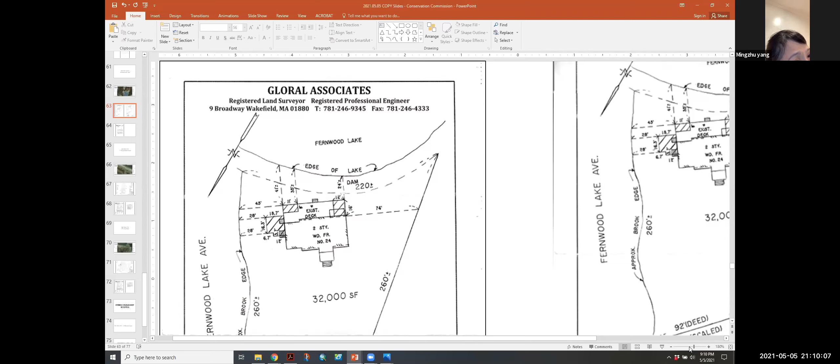This seems pretty straightforward, am I missing something, Adrian? Hello? Co-Chairman Gullah, the applicant does need to submit this plan set to the DEP for the analyst to review, so they have yet to issue a file number. Oh, because they haven't sent it into the DEP, is that what you're saying? They sent the notice of intent in, but they did not send the plan set.

Oh, they have plans, okay, and then there's the need for the narrative to be a little bit more robust for DEP to be able to see what they have in mind and approve it. Okay, so Mingzhu, you need to do more work. We don't understand enough of the project on the drawings. You need to put more information on the drawings, and then you need to send the drawings to the DEP so they can review it, and then they will issue a number, your DEP number. But we can't do that until you add more information to the drawings and send it to the DEP, Department of Environmental Protection. Does that make sense?

Okay, thank you. You're welcome. So we're going to continue you two weeks so you can send that stuff in and we can get a DEP number, okay? DEP, Department of Environmental Protection. You mail this to them, you want to do it soon. But first put more information, because there's not enough information here to show us where the deck exactly is, what's coming down, what's being built, and how they're being built. We don't have enough information here to make a ruling.

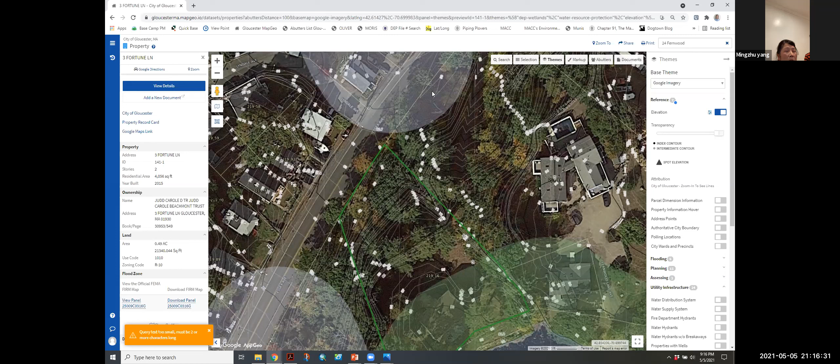It travels down almost adjacent to — if you back off, you can see where the stream is. It goes down to Essex Avenue, and you can clearly see that when you drive by Essex Avenue. And then it goes under Essex Avenue, back of Tony Tally's, into a stream that enters by 10 Stanwood down to what we call Red Pier Creek into Little River. I've monitored the area extensively.

All right, we'll have to take a look at it. We still need to continue, but that's odd. Right, you can drive up Fernwood Lake Avenue as a loop. I will, we should all take a look. We can, I will.

What I see here is a pretty steep section of ledge. The applicant's drawing was correct — the city wetland maps are incorrect.

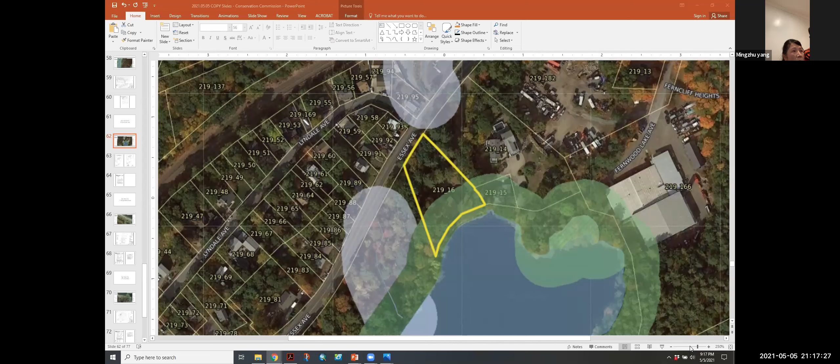Okay. All right, and Joe, you want to move to continue? Sure. Commissioner Jackson moves to continue the hearing for NOI 028, no DEP number, at 24 Fernwood Lake Avenue, for additional information to the Conservation Commission meeting of May 19th, 2021.

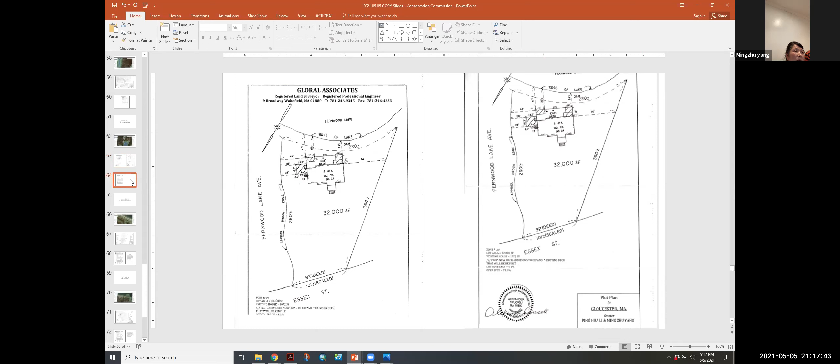Charpentier seconds? Need a roll call. Commissioner Charpentier, yes. Commissioner Cook, yes. Commissioner Gradwell, yes. Commissioner Sargent, yes. Co-Chair Mandela, yes. And Chairwoman Jackson, yes.

And they're obviously... I mean, I don't, okay, I'm good. All right, so in 2 weeks we'll see — excuse me.

2 weeks. Actually, we have a DEP number, I'll find out right now. Where'd you get it? We get it from Massachusetts, we have one. What's the number? I'll check right now. I'm going to send it to you.

Here it is, file number. It's blank. We're looking at it right now online. There's no number issued yet from the DEP. It's not there.

Mm, yeah. Just a moment. Give me one minute. Sure.